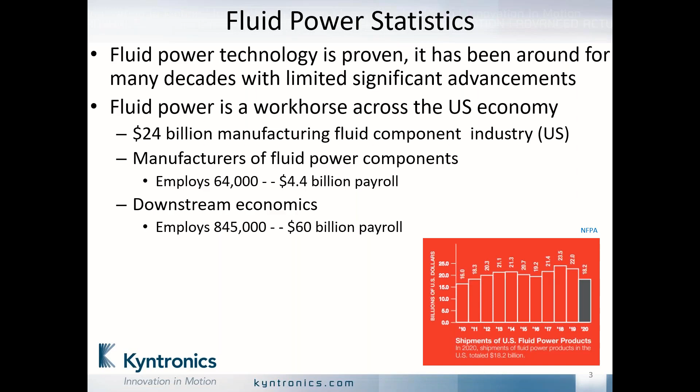That's the macro side. Again, staying on the macro, this is an interesting statistic: 1 to 2%, in fact I saw a study saying 3% of all U.S. energy is used on hydraulic systems. That's a lot. So around 105 quadrillion BTUs of energy is used in the United States. As I mentioned, 1 to 3% is consumed by hydraulic systems. We're going conservative around the 1%. That 1% equates to around $30 billion of energy being used for hydraulics, which is considerable. And this is in the United States.

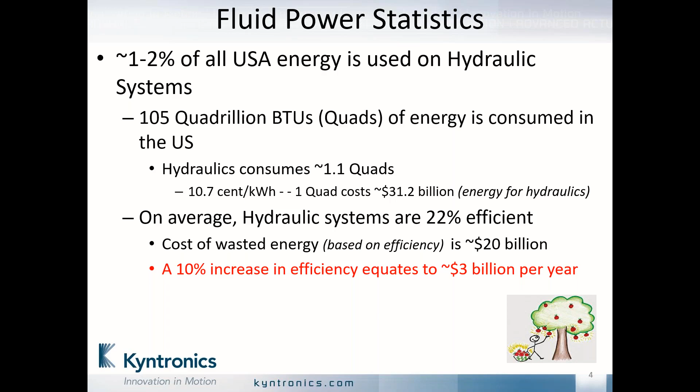So on average, hydraulic systems are around 22% efficient. So that's about a $20 billion waste of energy. And the point of this slide is just a small increase in efficiency equates to billions of dollars in savings to the factory. So that's the low-hanging fruit we're going to be talking about today.

So ESG scores. ESG stands for environmental, social, and governance. An ESG rating measures a company's exposure to long-term risks. It's basically the consulting firms - there's a bunch of them popping up here and there. You may or may not have heard of ESG scores, but it's becoming more and more popular, especially in some industries like oil and gas, etc. So they create this matrix of risks, and some lending firms base financing on ESG scores.

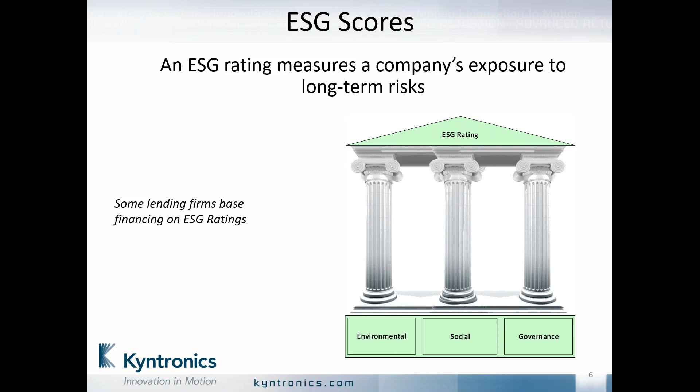Again, environment, social, governance: climate under environment, natural capital, pollution and waste, environmental opportunities. In the social world, there's various categories that people are doing a deeper dive in. On the governance side, it has to do with the corporate entities. For this presentation, we're just going to kind of focus on the environment and how to reduce that score and your footprint there.

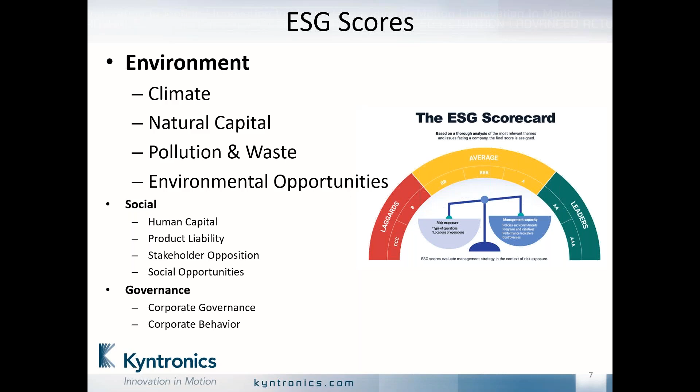So looking a little bit micro, in regards to some more fluid power statistics: 1 drop per second is about 400 gallons per year. At $30 per gallon, that's about a $12,000 cost to the business.

The next bullet's an interesting one - it's a hydraulic fluid index. This was a study done by, I think, Mobil Chemical. In the United States, they estimate it being about a 4-to-1 ratio. What does that mean? It means if your factory requires about 100 gallons of fluid for the various HPUs, cylinders and hoses, the factory would purchase in a year about 400 gallons. So about 300 gallons are being wasted in some sort of manner.

100 million gallons are lost every year in North America. That's about a 40-acre lake. Of course, there's environmental issues: potential groundwater, rivers, lakes, wildlife contamination, etc. We can all appreciate that.

Hydraulic fluid should be changed every 6 months or so, and there's costs associated with disposing that fluid as well. This is just an interesting number: $78 billion annual market is the global fluid market. That's huge.

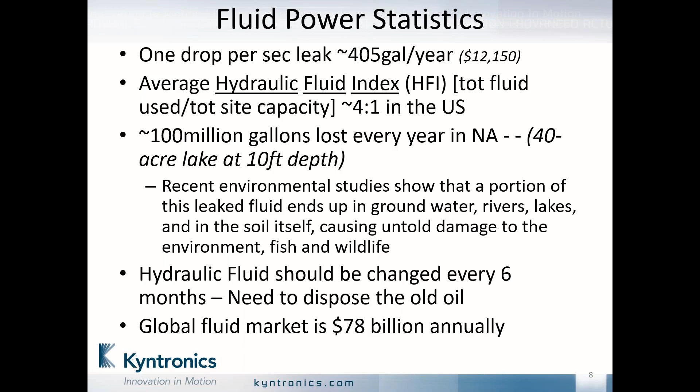So what is sustainable manufacturing? We've heard it - some companies take it a little more seriously than others. The bottom line, if you really look at sustainable manufacturing, there are costs associated with it, and there's cost savings that are available to you. And that's kind of what we're going to be looking at here.

Sustainability means meeting our own needs today without compromising the ability of future generations to meet their own needs. It's a simple statement, makes sense. 5 key factors: plant focused on the micro level, environmental, elimination of waste and pollution, reduce energy, save time and money, and also that human factor. Keep those in mind as we go through the presentation.

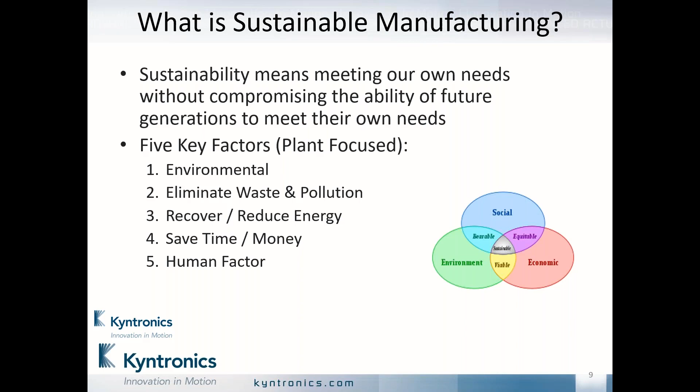This is a good summary from our wonderful government's website, Sustainable Manufacturing from the EPA. A large and growing number of manufacturers are realizing substantial financial and environmental benefits. That's kind of a key point. That's the point of this presentation, that there's financial benefits when you really review the numbers out here and do a deep dive.

Sustainable manufacturing is the creation of manufactured products, like the Kyntronics SHA, through economically sound processes that minimize negative environmental impacts while conserving energy and natural resources. Again, the SHA conserves energy. Sustainable manufacture also enhances employee, community, and product safety, reducing the noise component as well as the slipping and falling component from hydraulic fluid leaks.

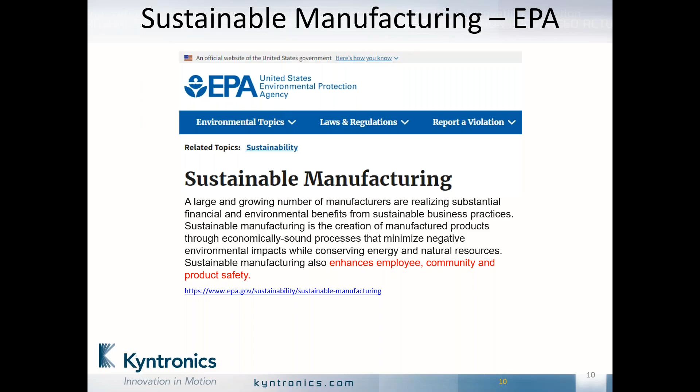More statistics: a study showed that every day in North America, a machine operator or technician falls on remnants of leaking hydraulic systems. There are costs associated with that - lost wages, downtime, personnel, medical costs, all those sort of things.

The second bullet is an important one. 80% of hydraulic machine and equipment stoppages - everybody familiar with hydraulics understands the contamination issue - 80% of stoppages on hydraulic machines are due to contaminated lubricants in general. That's a $10 billion loss per year in downtime, which is considerable.

With the SHA, there's no downtime associated with our product regarding contaminated fluids. Ours is a closed system. It goes through a lot of care when we're filling, making sure it's filtered properly, no air, and all those things that contribute to contamination.

$4,000 to $6,000 per minute. That varies from plant to plant, product to product, but there's a dollar number associated with downtime and with that contaminated liquid.

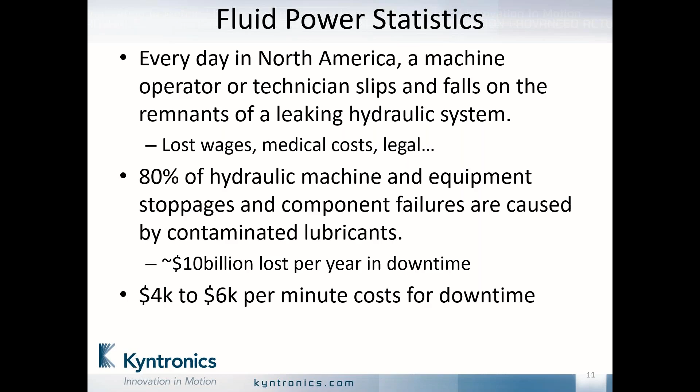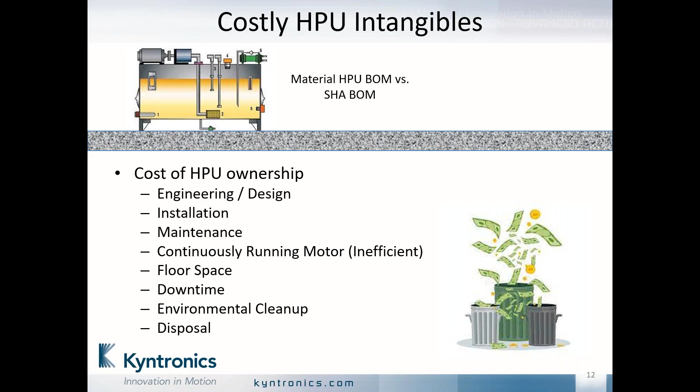On that equipment, a continuously running motor. There's also floor space - in some machines they like to be mobile, so you've got to have the HPU be mobile as well. Of course the downtime component we already talked about, and then you have the environmental cleanup and disposal costs. All these are words; we're going to try to put some costs associated with all this.

I'm going to spend a little bit of time on this particular slide, doing a little deep dive. There are 5 categories: environmental, energy, time and space, the human factor, as well as machine downtime and product quality.

The first section assumes a 200 gallon per year need for HPUs in the plant, assuming the 4-to-1 hydraulic factor index, and this is yearly costs. So the plant would have to purchase 800 gallons of fluid based on the HFI 4-to-1 index, which means there's a considerable amount of fluid that is going away.

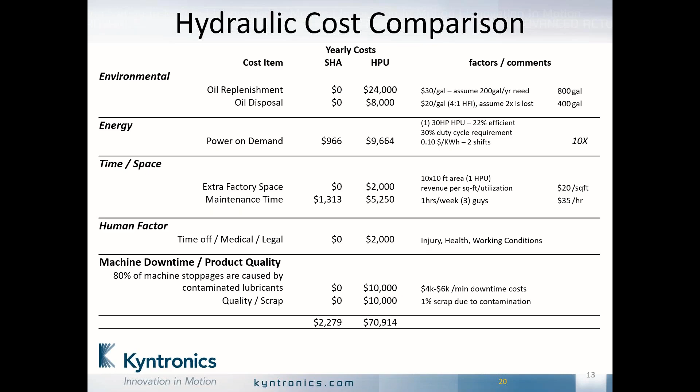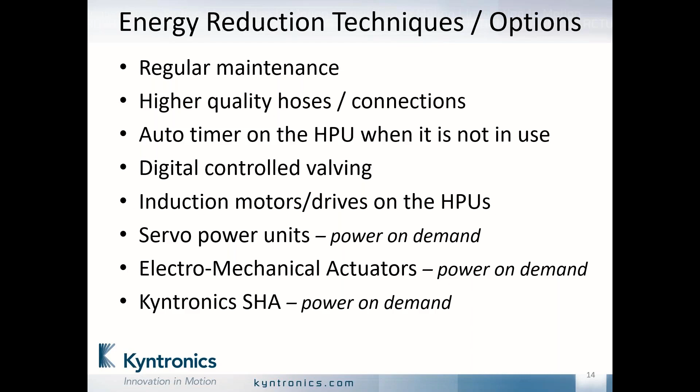I wanted to do a little analysis on EMA electromechanical actuators and their benefits, as well as the benefits of hydraulics. There's a lot of benefits with hydraulics - it's robust, high force density, and the fluid is virtually incompressible, which leads to good shock load handling. Hydraulics have no issues with shock loads. Ingress protection is also a nice advantage, and plant environments are always a challenge.

EMAs offer easy control, 4-quadrant control, and they're easily configured - both software and hardware, you can add or delete cylinders and actuators as needed. Power on demand is a big factor there, along with field bus connectivity, diagnostics, and all those sort of things.

So EMAs don't do well with ingress protection - there's a challenge there. Metal wear is load dependent; the higher the loads, the more likely the EMAs will fail. Shock loading is a major issue, which is why hydraulics have been the focus for a while.

Just a quick example - one large OEM we've been working with recently went down the road of replacing hydraulics, air-oil, etc. They went with an EMA manufacturer and did all kinds of tests at their plant in a nice environment. The EMAs are a little fragile, but in that controlled environment they ran thousands of cycles and everyone was excited. Then they distributed the product into the field in production and experienced real-life shock loading.

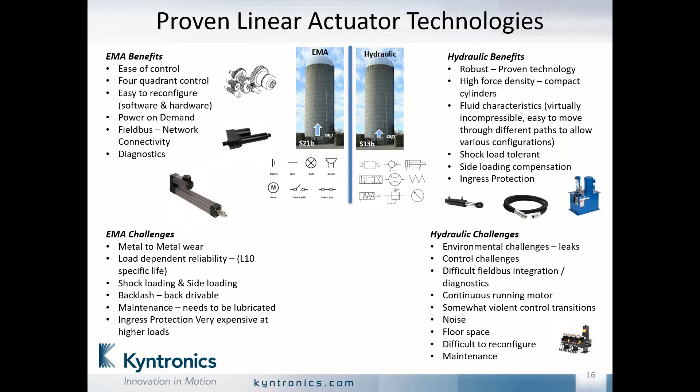So there are challenges with EMAs, and there are also challenges with hydraulics - the leaks we talked about, continuously running motors, difficulty to control sometimes, and those violent control transitions when switching solenoids back and forth, which leads to leaks, noise, floor space issues, and maintenance.

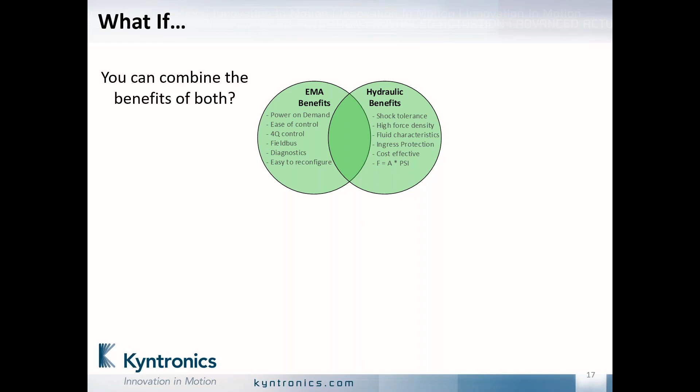So what if? What if you could combine both of the benefits of both of those technologies - EMA benefits along with hydraulic benefits in one product? That'd be a pretty special product. On top of that, you're eliminating the challenges of both of those proven technologies.

So with our product, the SHA, you don't have any metal wear, you don't have any leaks, virtually no maintenance, you get ingress protection, and it's powerful - all the benefits of both EMA and hydraulics.

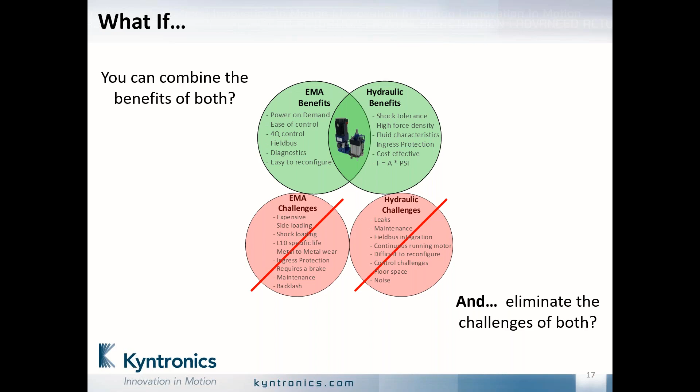A little bit of a deeper dive into the product itself, the SHA. I know a lot of you are familiar with it, some may not be, but basically it's just a servo motor connected up to a gear pump. Rotate it one way, you push the cylinder up. Rotate it the other way, it pushes the cylinder down.

Not a lot of components inside here. It's a powerful product. You can parallel these up as needed, up to 42-ton capability. Again, you can parallel up, so the tonnage can get significant.

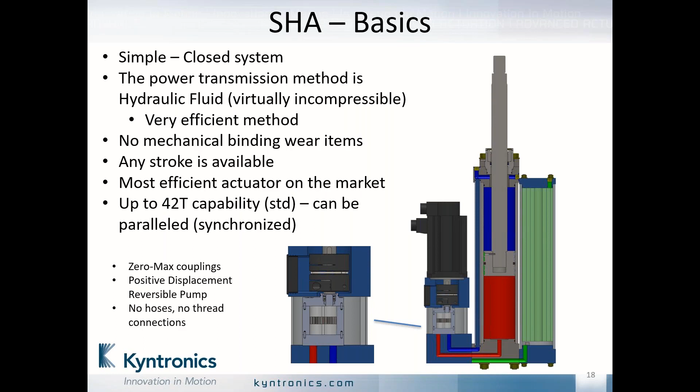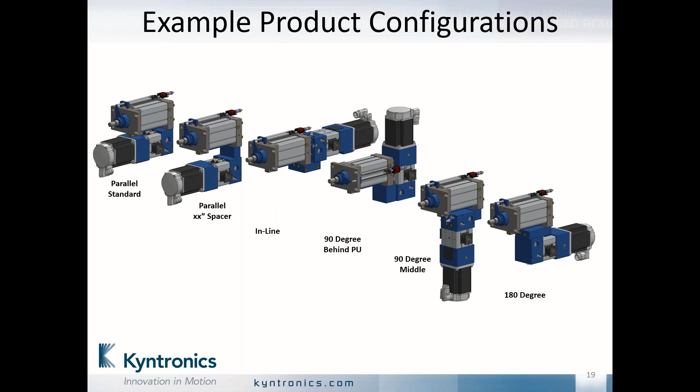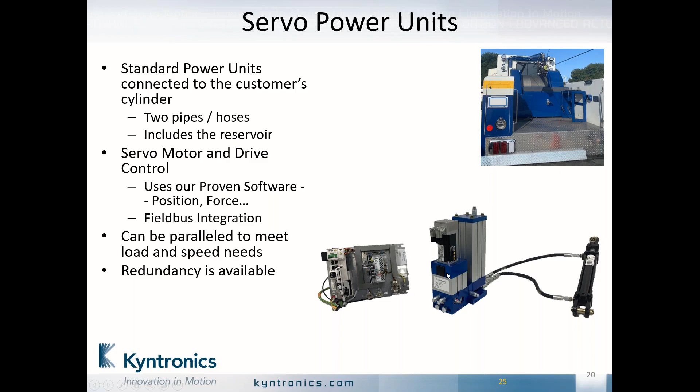So servo power units are also available as a solution for sustainable manufacturing. All-in-one solution - you've heard this before, a lot of you that are familiar with us. So we promote the all-in-one to try to eliminate the finger pointing.

We do all the testing in-house, sizing things up. We have partners out there also, Rockwell as well as Siemens and others that do the all-in-one themselves as well for the customer. So the Rockwell, a lot of you know, we have the AOI and the Siemens. We're working on things with them as well. So the all-in-one again is an approach that's unique with Kyntronics, trying to avoid the finger pointing - just so we don't like providing just an actuator and walk away. So we're going to provide the whole solution that we can do to get the whole thing working for you, regardless of the installation.

Hey Carl, forgive me for jumping in. I'm just going to point out the obvious, hopefully, and that is that any motor and drive can be used with our actuators, so you always have that option available with your accounts. And we just like to remind you that we're not a Rockwell or a Siemens value-added reseller, so they would source those drives and motors independent of us. We'll certainly assist them with the configuration and whatever they need. And in the case of the Rockwell, we do have this add-on instruction, but I just want to make that clarification. Thanks. Thank you, Mike.

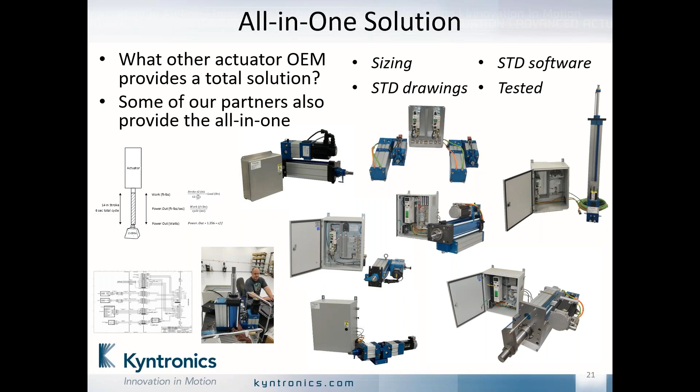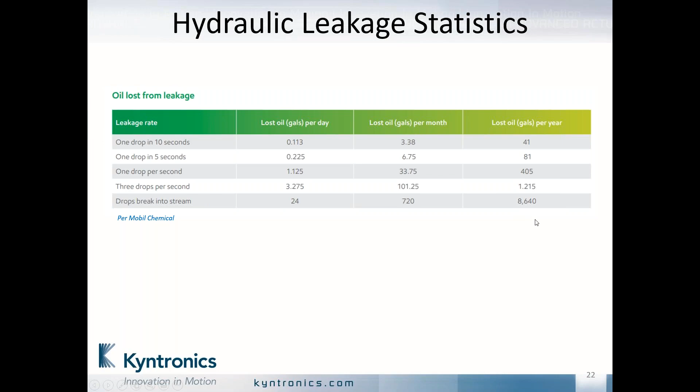So this is just a recap of some - this is from Mobil Chemical on lost fluid, 1 drop in 10 seconds, how many gallons per year that is. That's about 40 gallons per year, 5 seconds anyway. So when the drops per second, the quantity of drops per second, these are all dollars going out the door. And then, of course, environmental issues going with that, disposal and all those sort of things, and safety. So this is a considerable amount, depending on the amount of HPUs, et cetera, that are going on in the plant.

Sustainable manufacturing from the SHA's point of view. So reviewing those 5 key factors that I mentioned earlier - environmental. So how's the SHA apply to that? So again, it's no leaks, uses a minimal amount of fluid. Down here at 10,000 pound force actuator, 8-inch stroke, the cylinder is only about 14 ounces of fluid compared to a lot with an HPU and a lot with a gearbox.

Eliminate waste and pollution - eliminates the need to continuously replenish the hydraulic fluid, so you don't have to replenish it. Once we ship the actuator, there's no need to replenish the fluid. It's in there for the life of the actuator. So no disposal, no purchasing hydraulic fluid yearly, etc.

Recover and reduce energy - we talked about the power on demand. It only runs when it's needed to run, so you have a definitive yearly savings with the SHA versus the hydraulic world.

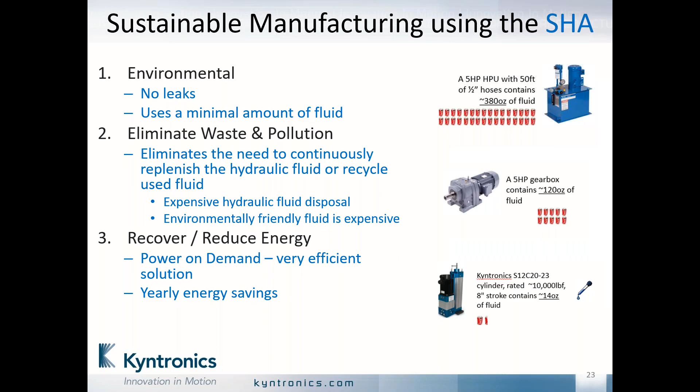Saving the time and money, reducing the downtime, contamination of the fluid, saves on design and installation time. We do a lot of that up front. Take the actuator out of the box, connect up the wires. Software's there, it's proven, ready to go. Less maintenance, of course. Easy to install and set up, as I mentioned. And you can reconfigure as needed - if you want position control today and force control tomorrow, you can easily do that.

As well as the human factor - so safety, no slippery oil surfaces, so you don't have the human contamination or the cleaning up of the hydraulics, as well as the factory's noise levels are significantly reduced.

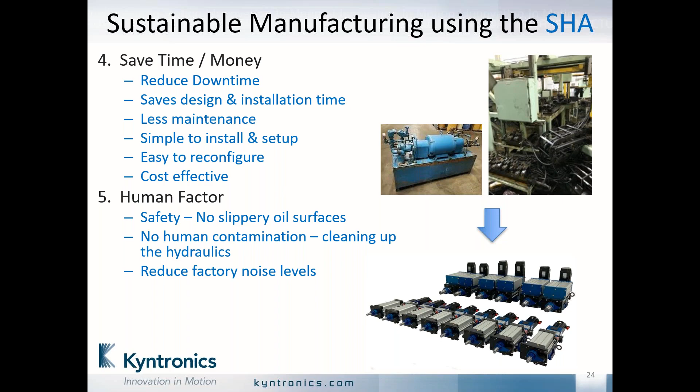So Kyntronics and our partners have done a lot of replacing of hydraulic systems for OEMs. Some plants are going down that road saying, hey, I want to go electric. So in summary, hydraulics are not going away. There are some places, some opportunities where you can use electric, SHA, as well as some of the EMAs. A lot of the hydraulics out there are just the way it is, 150 horsepower HPU. It needs to run fast or power. It is what it is, and it's going to stay that way.

But we've been very successful replacing hydraulics on a lot of equipment end users as well as OEMs with this combined technology that combines the benefits of those two proven technologies, EMA and hydraulics, as well as eliminating their challenges. So the SHA improves your uptime, environmental footprint, quality, efficiency, as well as the safety.

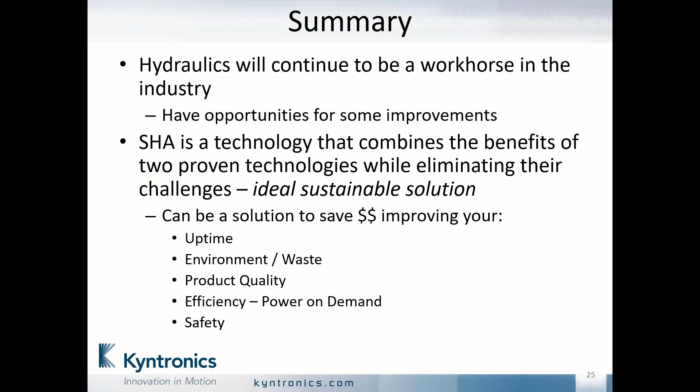That's the presentation.